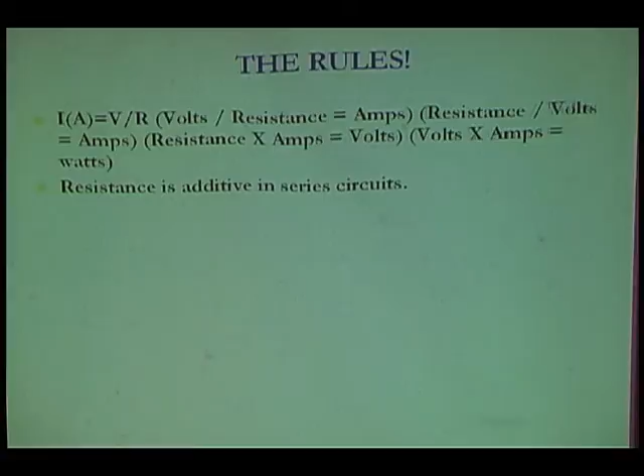Resistance is additive in series circuits. We often forget this. Current is additive in parallel circuits. Two things we seem to forget. Matter and energy flow from high pressure to low. This is all basic stuff. I'm not going to spend a lot of time on this, especially since I don't have a lot of time.

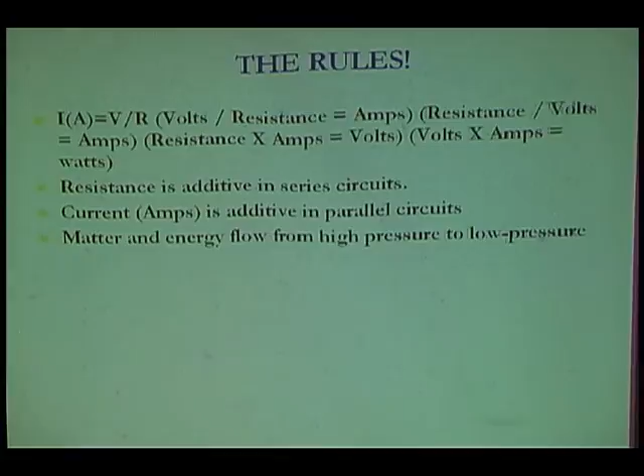All right, scientific method. Scientific method consists of collecting data and using observation and experimentation and formulating and testing hypotheses. I like to use this because sometimes we forget this. I call it analytical thinking. Don't be subjective, be objective.

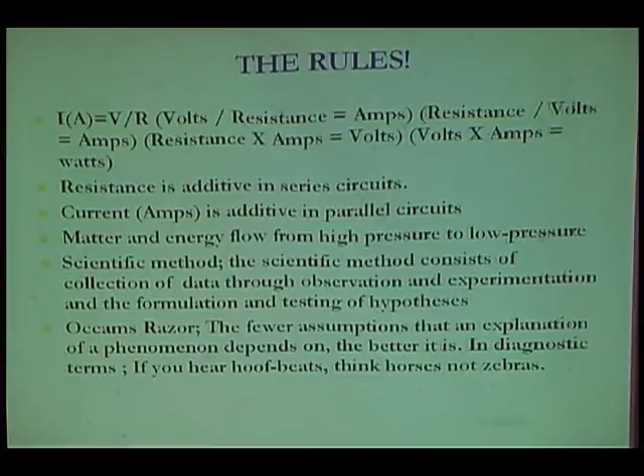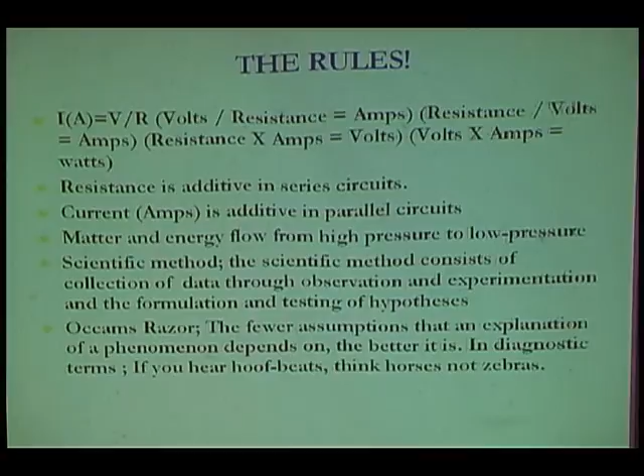All right, Occam's razor basically says the fewer assumptions that an explanation of a phenomena depends on, the better it is. Keep it simple, stupid. In diagnostic terms, I like this little phrase: if you hear hoofbeats, think horses, not zebras, unless you're in Kenya.

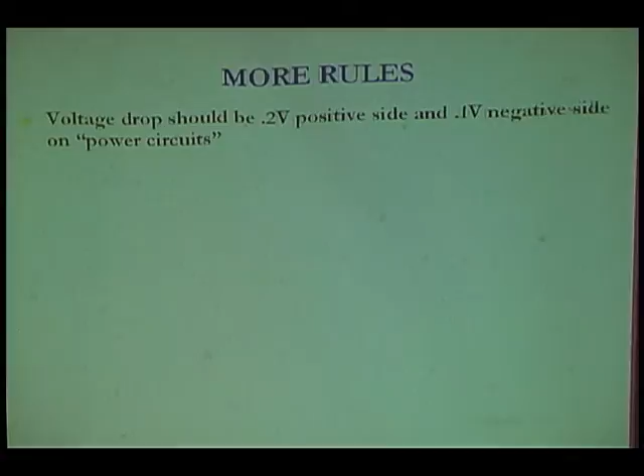All right, more rules. Voltage drop - I like these numbers. Some people have different numbers, but on a regular power circuit, not a sensor circuit, 0.2 on the positive side, 0.1 on the negative side. On sensor circuits we use a lot finer tolerance, obviously, 0.075 on the positive, 0.03 on the negative. Those are pretty critical numbers. A lot of people aren't quite that sensitive. I'm a picky bastard.

I like to test - this is part of the divide and conquer thing now, we're starting to get into this type of thinking. If you have a problem or you think you have a problem with voltage drop, test the entire leg, the whole circuit first. If you don't have a problem, you don't have to test pieces, do you? You only have to test the whole thing. Go to the load first, it's quicker.

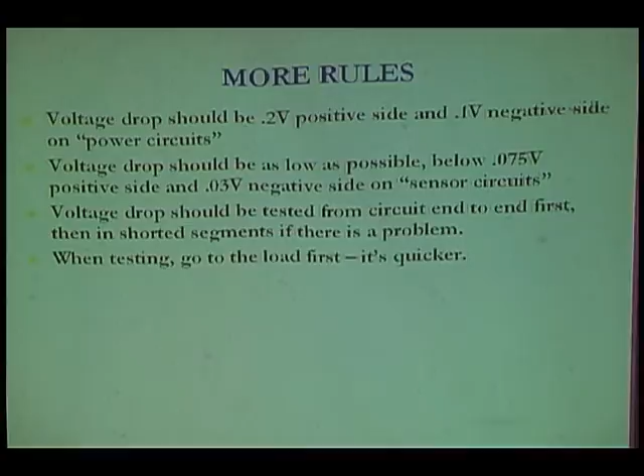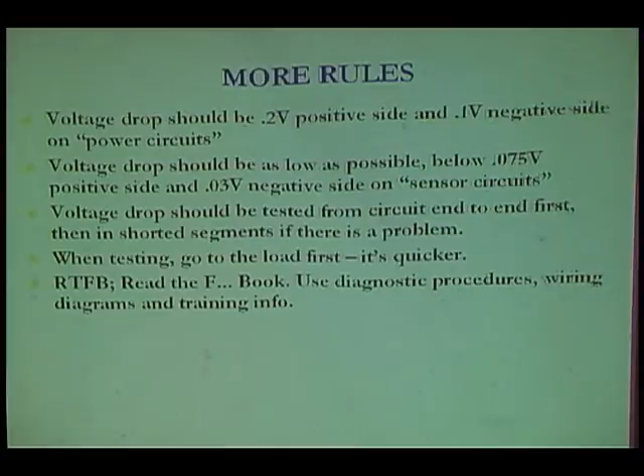RTFB, Jerry has said this millions of times, I'm sure. Check the information. Don't go at it like you think you know what you're doing and then only find out later that this is one of those - and we've heard some of these examples today - cases where your particular car isn't built the way you thought it was.

Read the instructions. Determine what is real. And by that I mean, what is your situation today, the car you have in front of you, not the ASE composite car example. First, look at the codes. We've been doing that a lot today. Look at the codes first, find common causes, record everything. John said this, everybody says this. It's a common thing. And then go on.

Check the specs. Again, that's an RTFB type of item. Examine freeze frame. Figure out what are all the common avenues that this trouble is taking you down.

Determine the applicable software level and updates. Now this is something in the BMW world we deal with a lot, where - and John again mentioned a little of this morning - you get a car that comes in, find out if you're up to the current software level. Sometimes it's simply a programming problem, and if you brought it to the newest software level, your problem would go away. Yes, Mike? What is CIP? CIP is a BMW term, coding, individualization, and programming.

It is all of the cars that were made since whenever the E65 came out. I think it was about 2001 somewhere. And everything after that in the BMW world uses CIP. It's really the way cars are going.

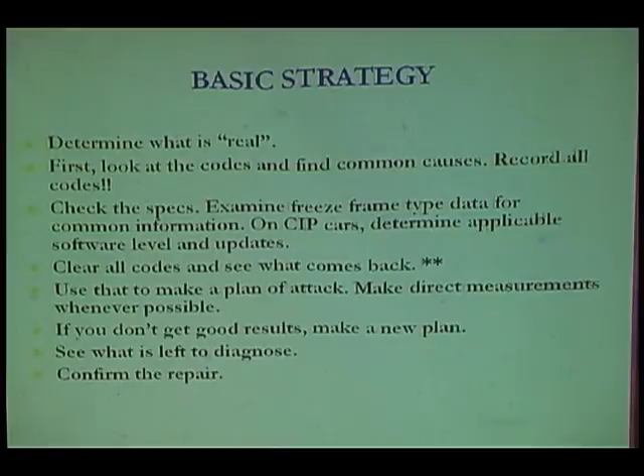Confirm the repair. A lot of times we don't do this in the business - we find a problem, we put the part in, we send it out the door. Oops, something else happens.

Here's a little strategy: if you get lost, if you're really swimming and can't figure out what you're doing, a lot of times I like to say I quit. I don't really quit, do I? But I turn around, walk away from it, and come back with a fresh head - get a cup of coffee, do whatever. The bottom line is you restart your thinking, reboot, okay? So if you think you've tested everything and you haven't got a clue, stop. You're just beating your head against the wall. Stop, turn your brain around, do something else, whatever it takes - go have lunch, and then start again.

Look at your plan - you're not getting it. It's not that you're dumb, it's not that you haven't thought of something - maybe you haven't, or maybe it's just that you're not looking at it the right way. Once you've got your new plan, follow that plan.

Go to your resources. Resources aren't just wiring diagrams - resources may be people in this very room, they may be IATN, it might be books. Whatever your resources are, use your resources. Don't be afraid to network.

Somebody else has probably been there - maybe not, I'm the lucky guy, I'm often the first guy to have a problem. Lucky me. But even then, it's a good idea to bounce it off somebody else. You say, I found A, B, C, and D - what am I missing? And somebody else may have something.

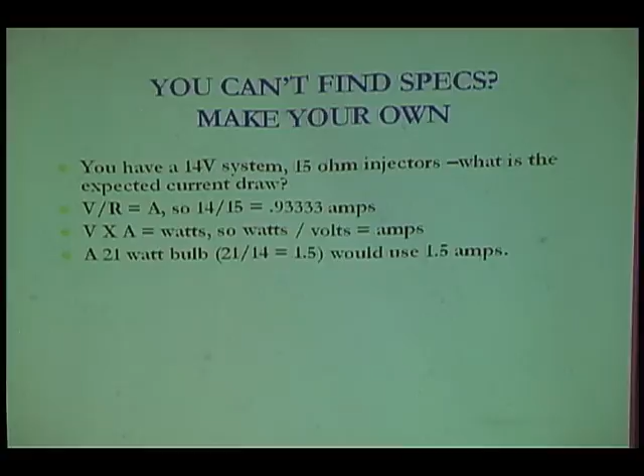Watts - you can use watts to figure things backwards. A lot of things are rated in watts, but we don't have an amp spec for that item. So, a simple example: a 21 watt bulb is going to use about an amp and a half in a 14 volt system. Since amperage is additive in a parallel circuit, you can figure out the total amp draw on the circuit by adding up the loads on every device. Again, very simple, but we often don't do it.

And you'd be surprised how many times I've found circuits that are really not engineered well that way. I like the 80% rule - for example, if you had a 10 amp fuse, you really should not have more than 8 amps of load on it.

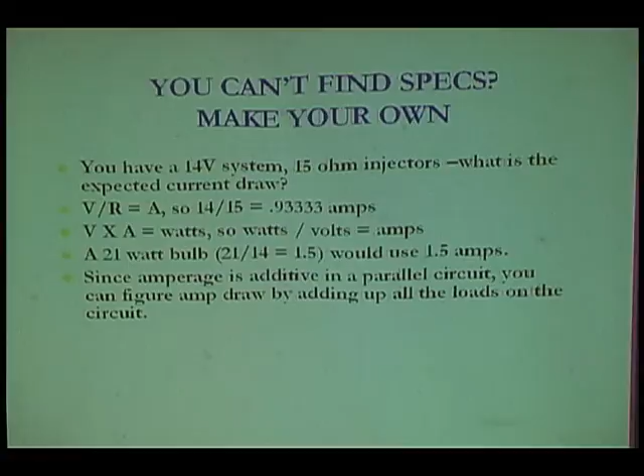We wonder why our fuse panels melt, right? When you end up with 9.4 amps of load on a 10 amp fuse. Okay, go past that.

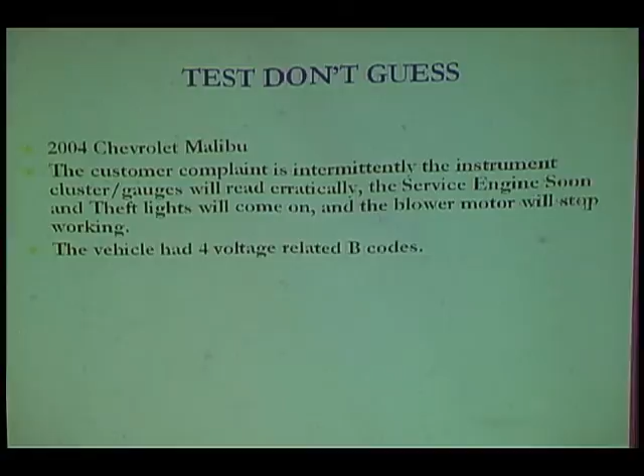Test, don't guess. This is actually something that was on IATN recently. A guy's asking for help, and he really kind of blew through the diagnosis and then asked for help. Customer complaint was intermittently the instrument cluster, gauges, service engine soon light and so forth - things will stop working and they'll flash. Vehicle has 4 voltage related B codes. That's where I would start. But he kind of started, he didn't really go at it using the scientific method.

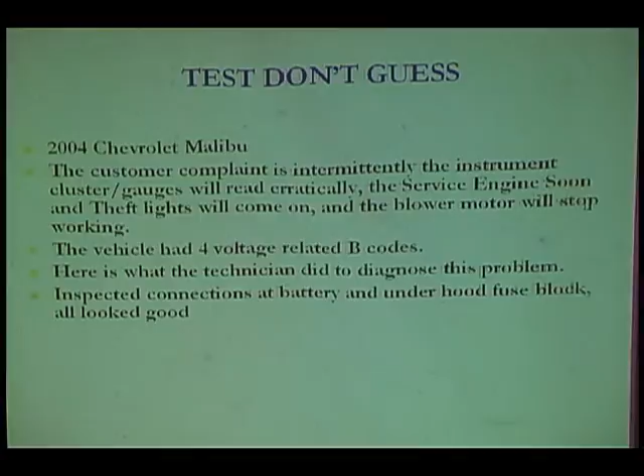Here's what he did. He inspected the connections at the battery and under the hood. I did not see him write down that he did a voltage drop test - he just looked at stuff and said, looks good to me.

He tap tested the BCM, inspected the connectors - again he just wiggled and shook stuff. Not really a very good diagnostic strategy. He didn't see any change.

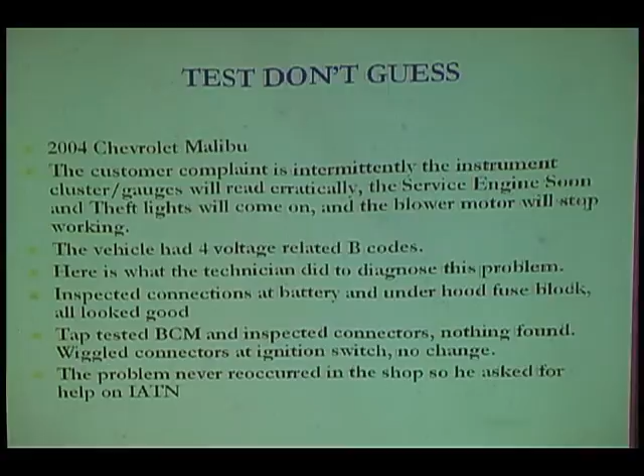He looked at the connectors on the ignition switch and was suspicious of it. The problem never happened in the shop, so he asked for help on IATN. What I'm trying to say here is he really didn't test anything, did he? He just kind of looked at it, shook it, tapped on it a little bit, and said, oh, I can't find it.

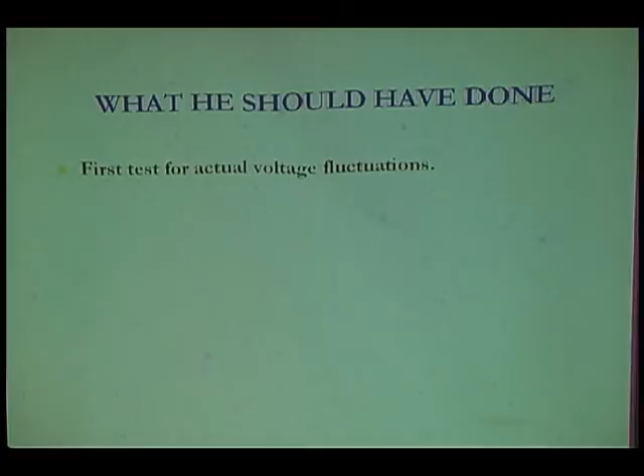First, if it was me, I would have been testing for actual voltage fluctuations. If I saw codes related to voltage, I would be putting a scope - a multi-channel scope - on each one of those control units or each one of those places that the codes flagged, and I'd be using flight record.

Here's a kind of a trick - John has gone through this a lot of times. If you have codes that are voltage high or open circuit type codes, you're looking at a ground problem - you have voltage. If you're looking at codes that say short circuit, it thinks it's voltage low - you're looking at a power side circuit, it's not getting power. Or it could be a real short.

But if it's a real short, wouldn't you have burnt fuses? So if you don't have a burnt fuse, you don't have anything that smells funny, the odds are you simply have a problem with a bad power supply. You don't really have a short.

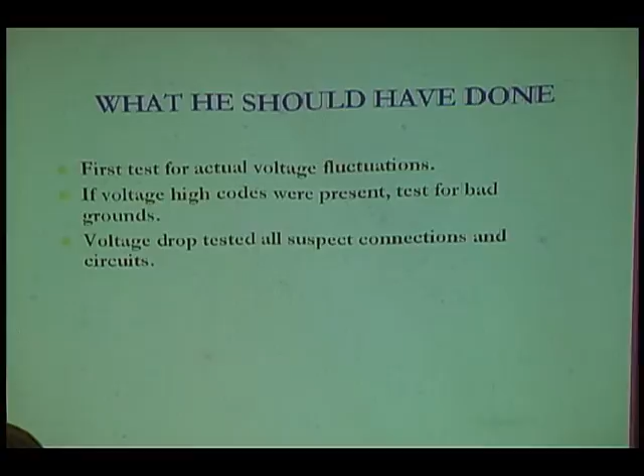Voltage drop all suspected connections and circuits. If a very fast event was suspected, use a scope in record mode. I said that before - even if it's really not a fast event, that's always the best way to do it.

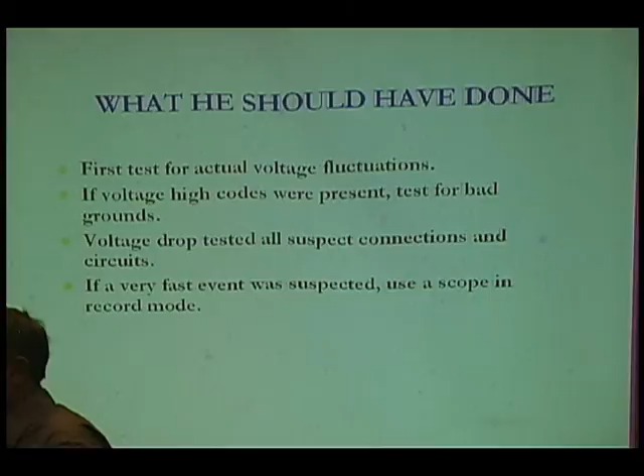Okay, again, basic stuff, I'm going to just throw this in. This is something Jerry used in his training a long time ago. This is a chart of exhaust gases. If you see something way off the chart, utilize that.

I can't really harp on this because I'm time constrained here. If you're over here and you have very high CO, very low CO2 and so forth, you're rich. Conversely, if you're over here and you have that mix of gases, you're lean. That's why I like the exhaust analyzer, because it's real time.

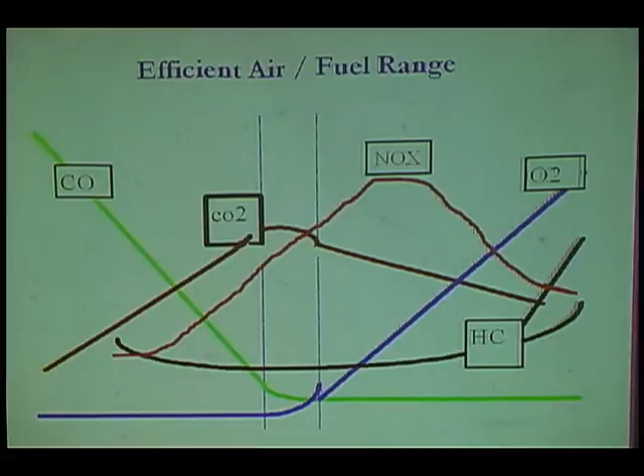However, this really works pre-cat without an air pump running. So if you have a system where you think you might have air from an air pump circuit, that skews these results - you have to isolate that. But again, it's one of those things where you want to know what your real numbers are.

This is a matrix that was used in, I don't know, ATTP training in New York State, and it's kind of a nice frame of mind straightener. If your computer response is rich and your O2 signal is rich, you have a feedback system problem, or you're looking for the wrong input, or a PCM problem, and so forth. I can't really even go through all of these because I'm running out of time.

Again, if you have a rich computer response to a lean condition from the O2 sensor, your feedback system is working properly, you have to look somewhere else. And conversely, if you have a computer response that's lean to a rich O2 sensor signal, your feedback system is working properly and you have to look somewhere else. And the last grid, a lean O2 sensor signal with a computer response that's lean, you have to look for a feedback system problem, a wrong input, or a PCM response that's bad. It's just a very simple thing.

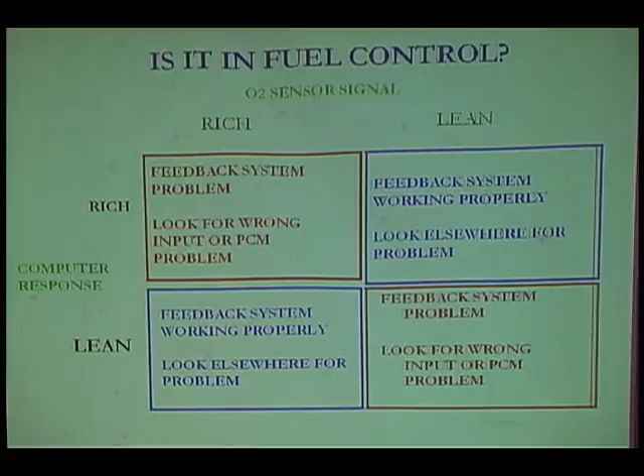Okay, Pierre, let me interject something there. Some of that in Troubleshooter on Snap-on or Pathfinder, like the oxygen sensor test, if you touch the positive battery and stick your hand on the other side of the oxygen sensor and look for the response, did your scan tool go up? Then take your hand and put it to the negative side of the battery. That's what he's talking about. A lot of those things are in those scan tools to really help you out.

Here was, I know BMW was not supposed to be part of this. Jerry said there wouldn't be any BMW examples. Lock and load, he knew better than that. So we have a 2003 BMW that actually kind of kicked me, that's why it's up here. The car came in with a MIL, stored codes for cylinder 3 and 5 misfires. Mode 6 confirmed the car never missed, nothing changed while it was in the shop.

Spark plugs were carbon tracked. The first time I saw this car, the carbon tracks were pretty bad, and I just said 116,000 miles and original spark plugs, come on, how hard can this be? I put spark plugs in, exhaust gases were pretty normal except for slightly high HC, which I'd kind of expect with misfiring from bad spark plugs. Compression and leak down were excellent. I replaced the spark plugs, cleared it, said I'm done, go home.

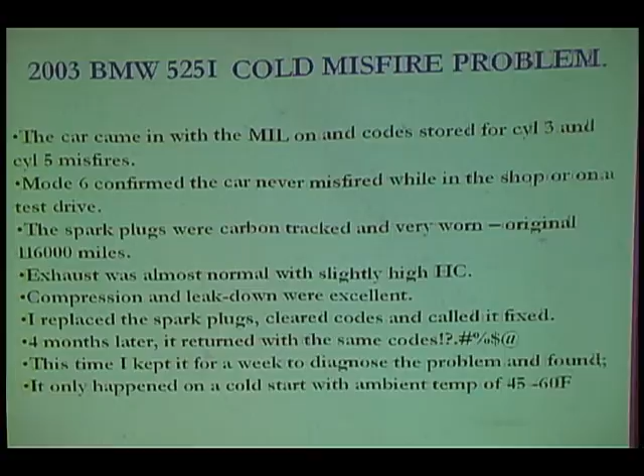4 months later, late November, December, it's not so warm out anymore. The car comes back with exactly the same codes, and I'm cursing under my breath. This time I kept the car for a week and put a scope on it and really went after it. I found out it only happened between 45 and 60 degrees Fahrenheit. If I left the heat on in the shop at night, it wouldn't occur. If I put it outside, it would occur, but my diagnostic equipment wasn't really on it. So what I found was that if I turned the heat off in the shop at night, or down real low, and had my stuff on it, I could get it in the morning.

Here was my first time, when I first had the problem happening for real in the shop. There are 6 injectors, but I only have 5 here because I was running out of channels. I had an 8-trace scope and had some other stuff on it. But basically what I find is this cylinder here, which is 3, is repeating with almost no pulse width over here. It was double firing the injector. It was also double firing the next one, I think. Well, you can't really see it, there's a pink one here, there's one that's double firing as well that I wasn't really tracing on.

The next screen, if I can get it to happen, kind of shows the same thing. It's the next thing in sequence, but the cylinder cut out. The cylinder stopped firing. And what I want to show you here is...

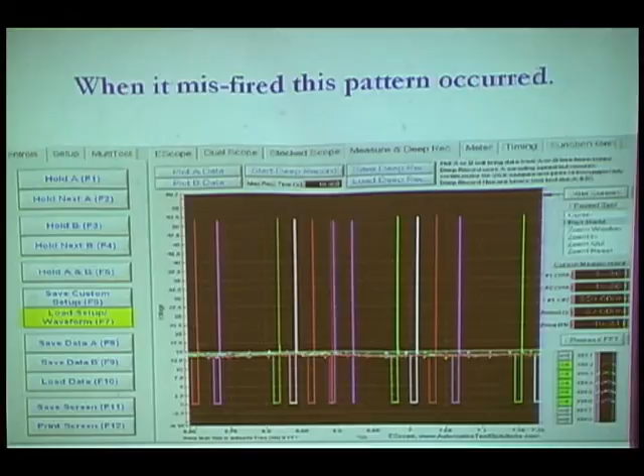I thought this was a computer problem. I really did, and I condemned the computer. But guess what? It's a strategy, and it's not published, at least to my knowledge. Now, I presented this to a BMW group, and somebody in the group said, oh yeah, there's a publication about that. So I went back and looked at everything I could find. Well, he must have seen it somewhere, but I never saw it, I never found it, even looking back. Bottom line is, I condemned the computer because I saw a cylinder going down.

In reality, after I put the computer in, 2 months later, now this stuff didn't happen right away, I didn't mention that, it's just really intermittent, 2 months later it came back with the same codes.

Exactly, cylinders 3 and 5. Now, looking at it in retrospect, cylinders 3 and 5 are sequential in the firing order: 1, 5, 3, 6, 2, 4. Cylinder 3 was the worst cylinder, but somehow 5 got dragged along, even though it was a preceding cylinder in the firing order.

Since then, a couple of them have seen it a couple of times, and it was lifters. More accurately, there was a problem with these 15,000 mile oil changes. The lifters get little striations and they cause chatter marks in the bore of the carrier. It's not just that you have to change the lifters, you have to change the whole carrier as well. And they're hanging on a cold start, leaving the valve slightly open.

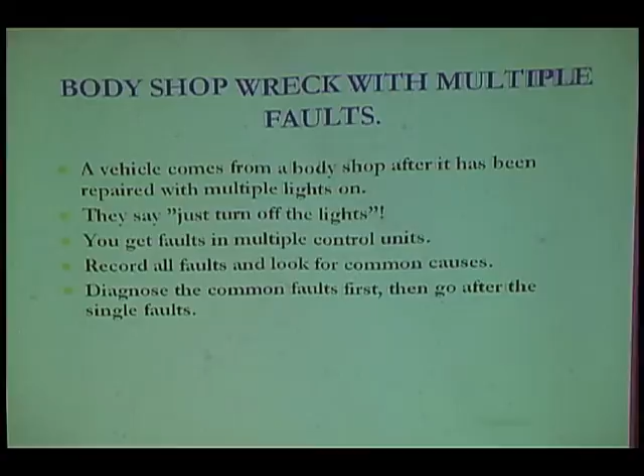Yes? Why was the strategy to double fire the injector? My guess is that it saw a problem with the lifter creating a breathing issue with the engine. The oxygen sensor saw that as lean, and it decided to double fire the injectors to see if the injector was just a little lean because of blockage in the inlet of the injector or a problem with the injector pintle, and it therefore double fired it a little bit just to see if it would squirt a little more and change the result, if the oxygen sensor would respond.

When the oxygen sensor did not respond, it then said, we have a problem that I don't know how to deal with, and therefore I'm just going to shut off the injector and turn on a light. That's my theory. So your theory was that was the strategy. The strategy was there to save the catalyst, but it was going to do it by first deciding whether it had a problem with the injector that it could simply widen up or change pulse width. I don't know why they didn't just widen the pulse width on the single pulse instead of double firing it.

When it turned off, Pierre, did it ever come back on? The question from Paul was, when it turned off the injector, did it ever come back on? And the answer is, as soon as I turned off the key, whether it had been running a few seconds with the miss or a long time with the miss, it would immediately run on all 6 cylinders again and never come back until it cooled off again.

You could run the car for days. Also, I found - I don't want to spend a lot of time because I'll run out of time here - but the bottom line was, I found that if I started this car cold below 45 degrees and took it on the road and revved it up, the lifter hang-up problem was not evident because you kind of powered through it and the problem never occurred. And once the car warmed up, you'd never see it.

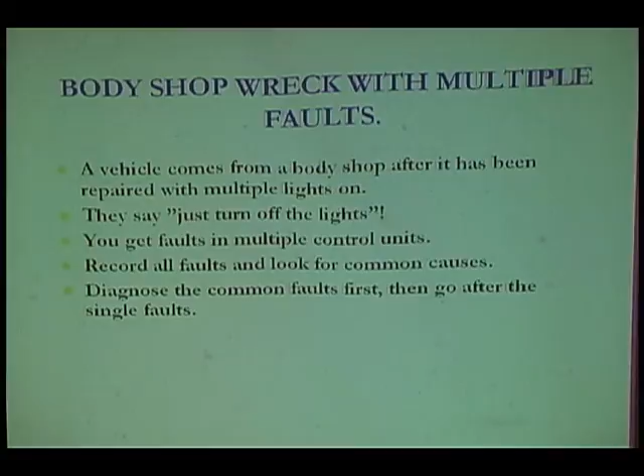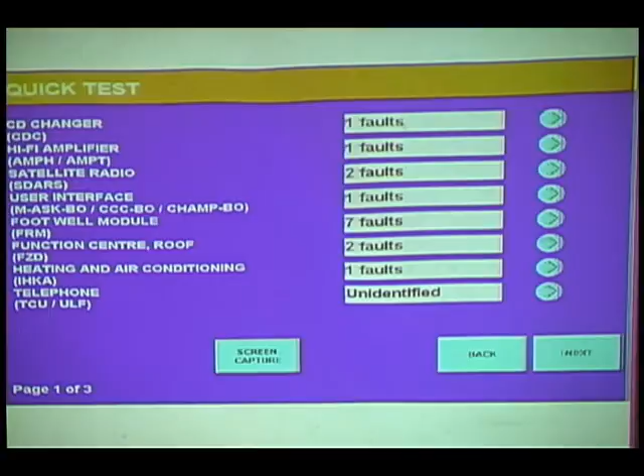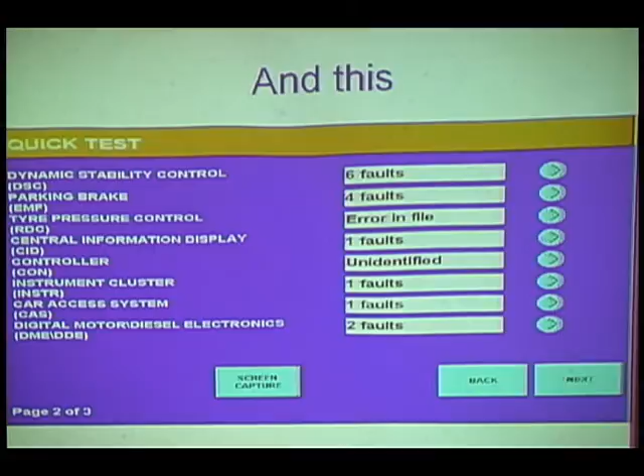All right, when we get to body shop stuff, which this is kind of the beginning of, I'm going to blast through a lot of these screens - we'll get a lot of screens like this. This is off the AutoLogic tool, and it's in your printout so you don't have to really see that, but what you will see is a lot of screens with a lot of redundant codes. Sometimes you get something called an error in file or an unidentified fault, and that means, as John was saying, it doesn't mean it's not a real fault - it means AutoLogic does not have an interpretation in their scan tool that tells you what it means. It's not identified to you, but it's real. If you log these in AutoLogic, or if you have a factory-level tool, you'd already know it. But if you log them in AutoLogic and send them in, they will usually do homework very quickly, sometimes the same day, and come back to you with an interpretation. But that doesn't help you that second. Bottom line is, you get a lot of faults - sometimes like light module, 25 faults - and the car was crashed in the front. Well, how many lights are in the front of that car? Maybe 25?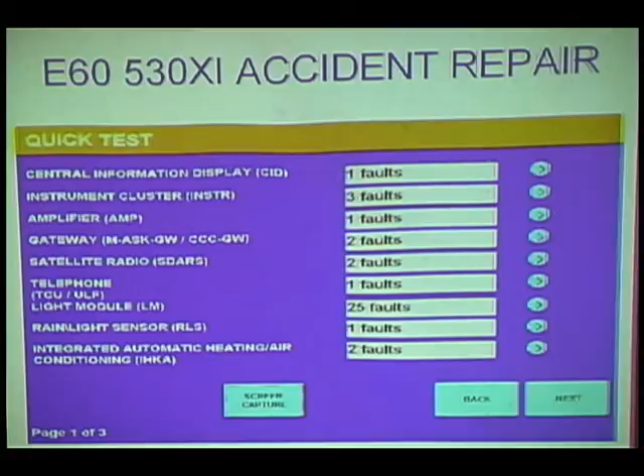Sometimes some of these were historical faults from before the accident, like a tail light or a signal light out. Bottom line is, see what it has now. Log all that, but see if it's a problem that's still there. The instrument cluster—a lot of these faults will turn out to be voltage-related, or there will be some commonality. The bottom line is the strategy: record what you got, clear it, and see what's common.

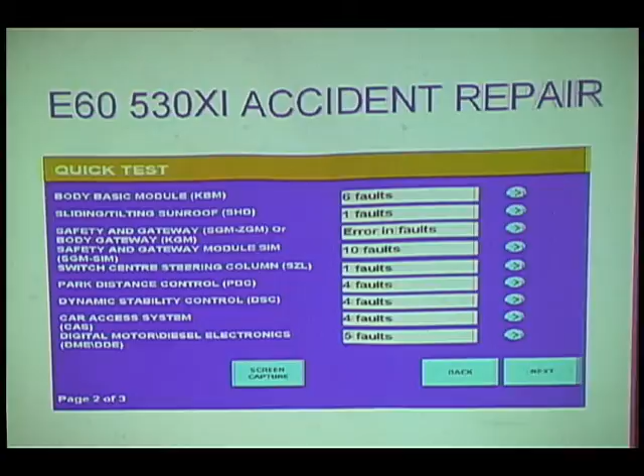If it's voltage and it was a car that was in a body shop where the battery could have gone dead or something could have been disconnected, I'm going to look at it again, but I'm not going to place a lot of credence in that, because I want to put the forks in the road in my diagnostics. So I'm going to go look at that, see what's there, clear them, and see what comes back and what's common.

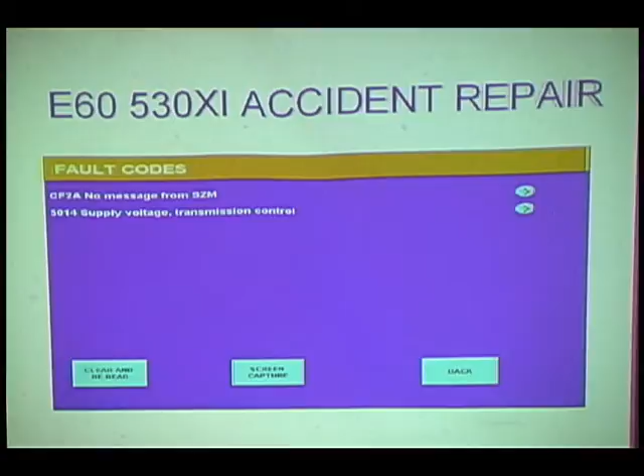All right, we're going to blast through there. Here we have a common thing: supply voltage transmission control. You'll have about 3 codes that tell you it's voltage. This is one of them, supply voltage. Another one is terminal 15, which is ignition switched voltage. And another one that sometimes comes up is terminal 30. That's a different story, but it's still voltage.

In this case, I cleared all the codes. I checked the battery and did basically a charge start system test. I made sure the battery was good, the charge system was good. I did a quick check of powers and grounds on a few choice locations, and the car was good. He had run the battery down, charged it up, hadn't blown anything up, and we didn't have any voltage codes coming back. However, we did have all 4 ultrasonic sensors in the front bumper coming back.

And the car was hit in the front. And they came back immediately. Doesn't that just make you think maybe something's wrong?

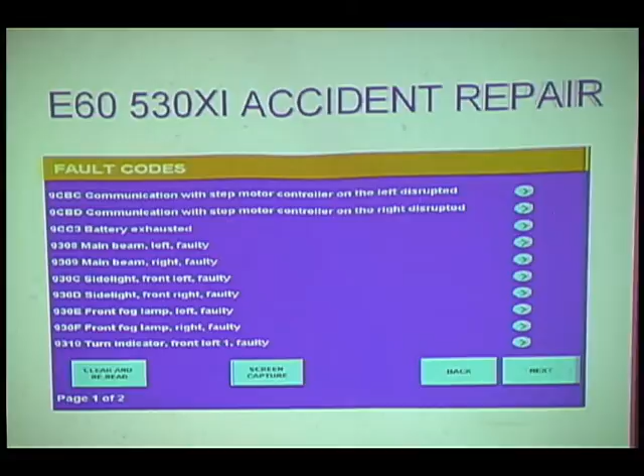Right? Okay, we had a bunch of—actually, I probably mixed this slide up a little bit. We had a bunch of these codes. These were actually more explanations of the previous codes, and again, they weren't so important.

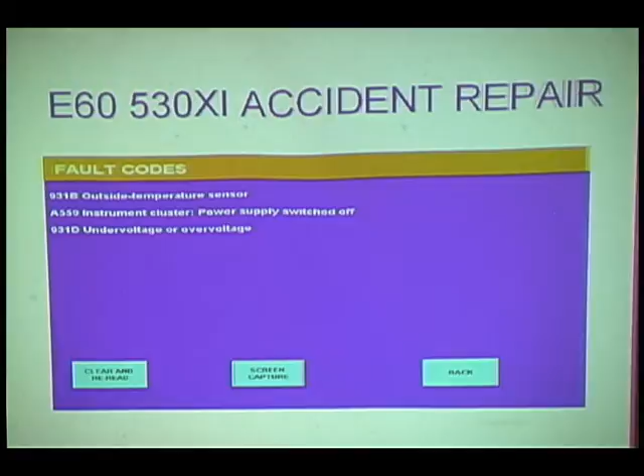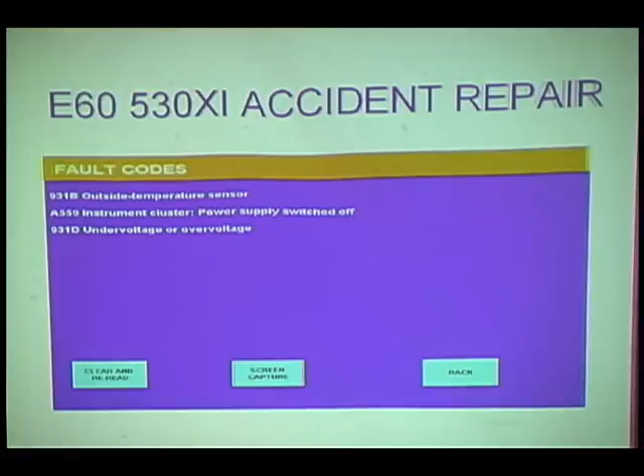But those sensor codes in the front were important. The car had an outside temp sensor code, and it had an under voltage or similar code. The under voltage codes did not come back on this, but the outside temp sensor did. So we had front sensor codes and temp sensor codes, all in the front bumper. I looked in the car, the sensors were there, and where do you go from there?

When I tested the results, I found that every sensor voltage was pegged at a shorted range. Bottom line was, when I went into it, I found the voltage codes were gone after I looked at it, that the light codes were, obviously, from the collision, like I said before, and the battery was just a dead battery. I looked for the uncommon faults, and I found those sensor codes with the parking distance control sensors and the temperature sensors.

And when I diagnosed it, what I found was they had put the wiring harness for all the sensors—temp sensor and parking distance sensors—between the outer skin and the actual bumper in the front of the car. And when they bolted it together, they squished them all together and shorted every single one together.

It was a classic. I wasn't going to take it apart myself—they're the body shop, so I made them take the bumper back off and fix it. And then they came back and I cleared out the codes. But that's what it was.

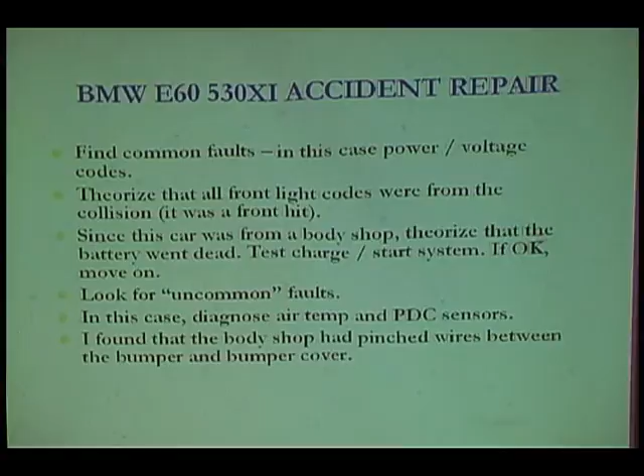So again, get rid of the stuff that's common and easy and probably explainable. Make sure it's a one-shot deal. In this case, the body shop let the battery go down. And then go after the stuff that's left and uncommon.

All right, is it mechanical or is it electrical? A car came in with secondary injection codes on both sides. If it has 2 banks or two sets, they split them even on a 6-cylinder. In the case of a BMW, they split it as cylinders 1 through 3 and 4 through 6—bank 1, bank 2, okay?

Separate the electrical from the mechanical by testing one first. I'm not going to say always test electrical first or always test mechanical first. I like to be lazy—do the one that's easiest, do the one that's quickest. Or if you have a feeling about it, you hear a funny noise, smell a funny smell, or something vibrates, go after that first. Bottom line is: split, test one, and decide whether it's one side or the other.

In this case, using the oxygen sensors to test it with a scan tool is probably the easiest thing to do. Does it work? Does it work at all? If it doesn't work at all, in the case of a secondary air system—but this is true of other systems too—I would go right to the device and check for power and ground, power and trigger signal, whatever it is. In the case of a secondary air system, you usually can reach the motor pretty well, at least on a BMW, so it's not too hard to go check if you have system voltage and if you're getting the motor turned on. Now a little caveat, a little warning here.